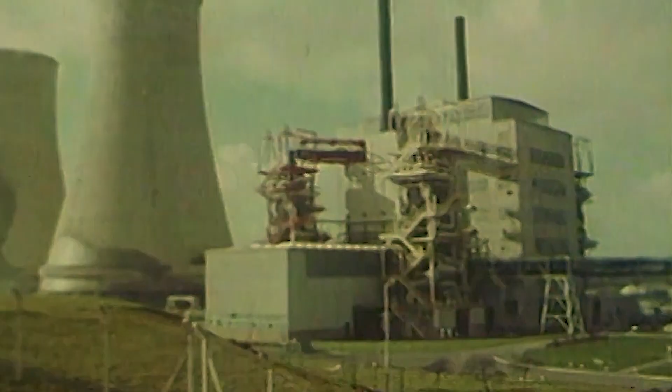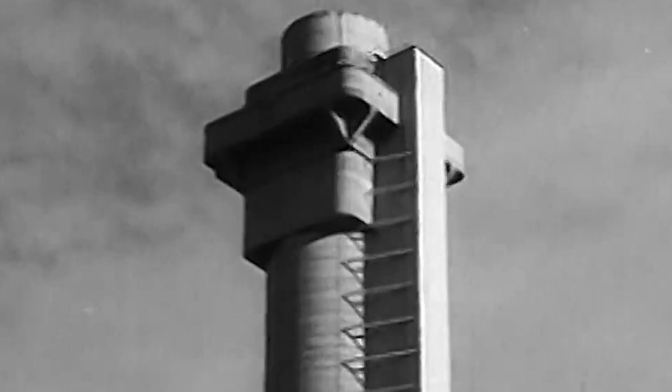Shortly after starting the operation of the piles, and even before the famous accidents, development of a much more economical system was on its way. Magnox was slowly being born with dual purpose in mind. Waste heat the piles produced was now utilized to generate electricity for the national grid. Coolant was far superior in both safety and thermodynamic properties.

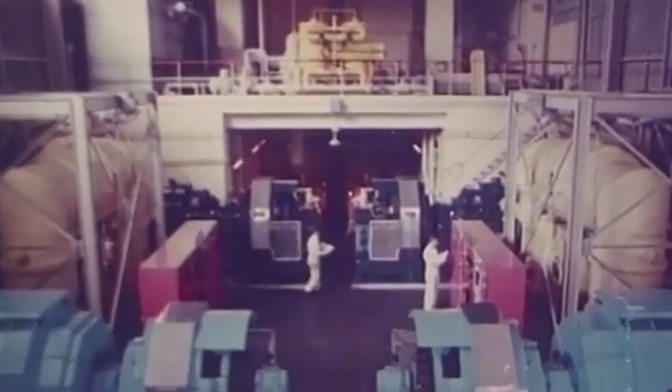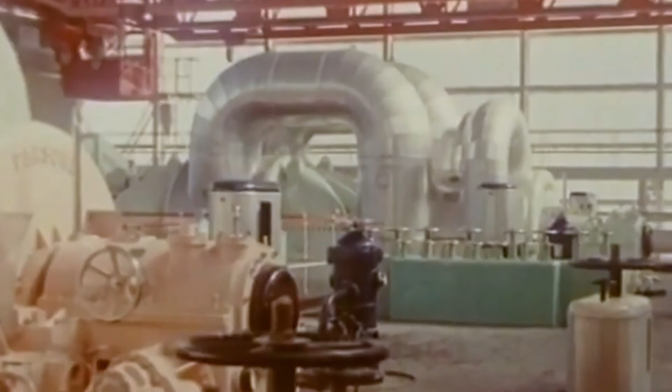Development and evolution of new technologies wasn't stopped there. Parallel with Magnox operation, experiments with an even newer and far superior reactor type began. It was known from the early days of Magnox that it would never be an ideal reactor for pure civilian use of electricity generation. So new, strict and highly ambitious goals were set to make a reactor capable of utilizing state-of-the-art turbines at the time. Turbines whose parameters could be obtained only by fossil fuel plants. In order to obtain those parameters, drastic changes in reactor design were needed.

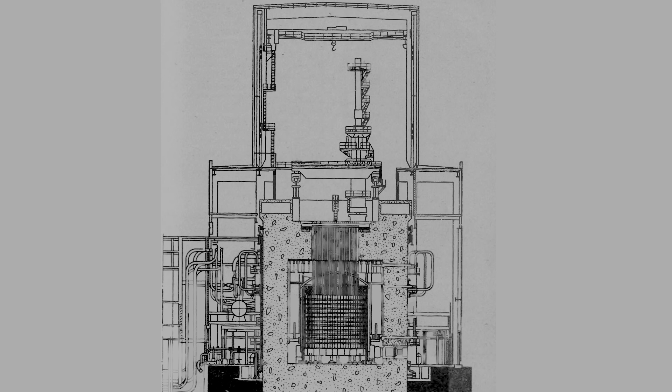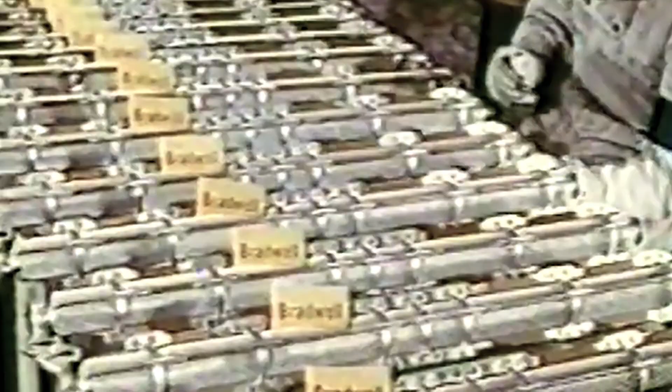High-performance turbines required high-parameter steam. In order to achieve that, the fuel operated at much higher temperatures. Magnesium alloy as cladding and uranium in its metallic form as fuel were no longer suitable. Metallic uranium would alloy with practically any cladding material, so its ceramic form was chosen.

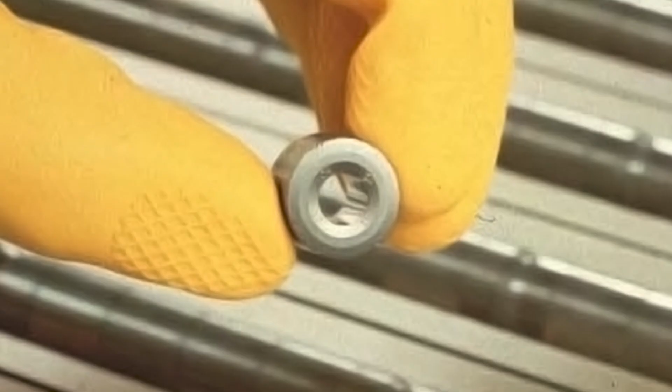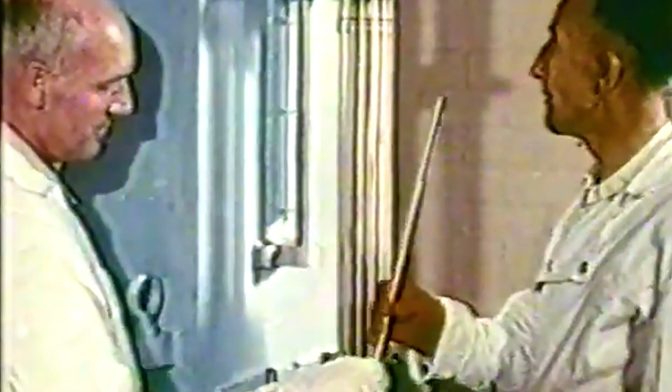Fuel pellets are hollow in the middle. Such design prevents high temperature accumulation and makes room for fission gases. Many of such fuel pellets were stacked inside a fuel pin. Stainless steel was chosen as cladding. Magnesium alloy would simply melt. The new material changed the neutronics of the reactor. Because of the higher capture cross-section area of the stainless steel, enriched uranium was now required.

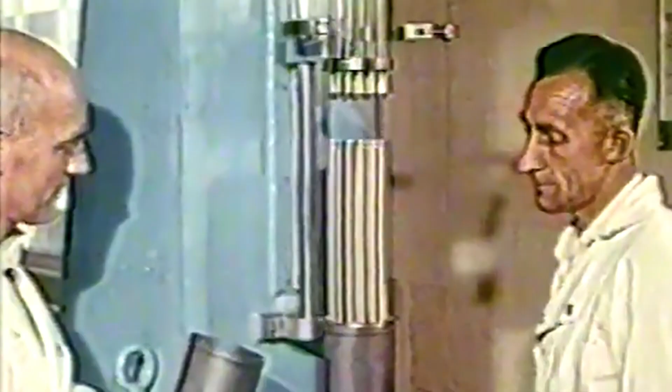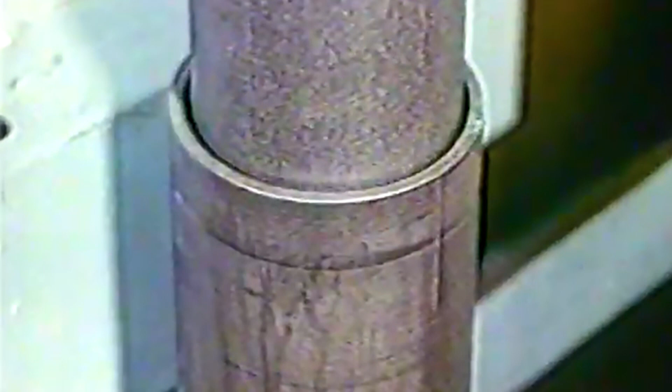Many of such fuel pins in a bundle made one fuel element, and 8 of such elements make the fuel assembly or the stringer. A graphite sleeve is used to divide two gas streams, one of them reentrant.

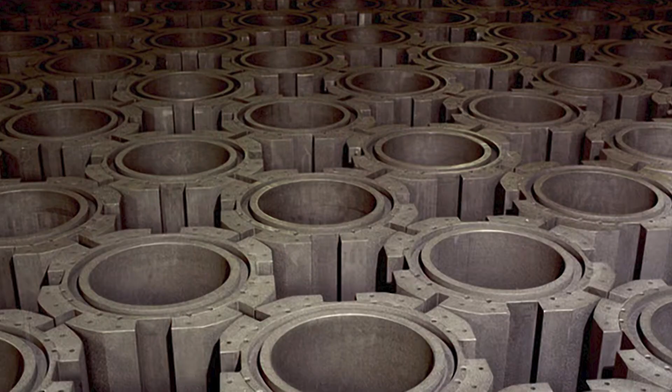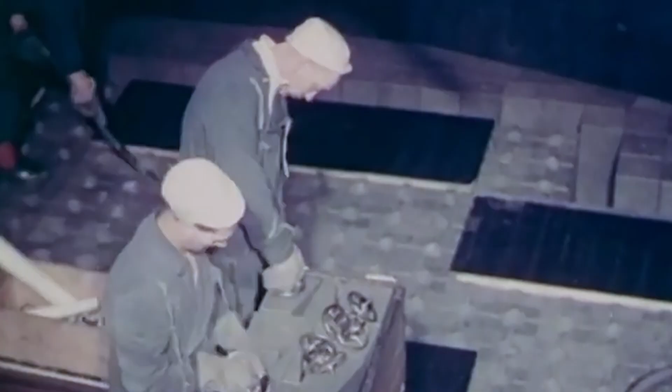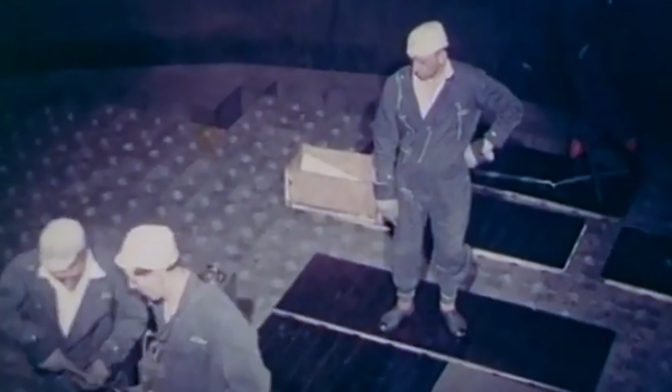Higher fuel temperatures and higher neutron flux degraded the graphite at a much higher rate. Higher temperatures would potentially cause the Boudouard reaction, a reaction between carbon dioxide and graphite, making carbon monoxide. We could simply cool the reactor graphite with the gas stream parallel to the flow around the fuel elements. Unfortunately, such an approach would simply dilute the high temperature gas coming from the fuel channels with the relatively cold gas coming from graphite cooling.

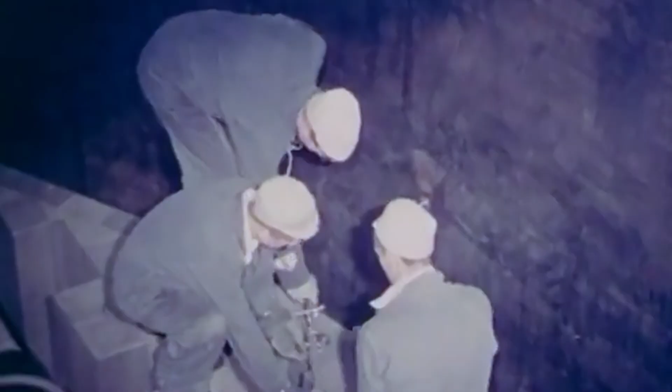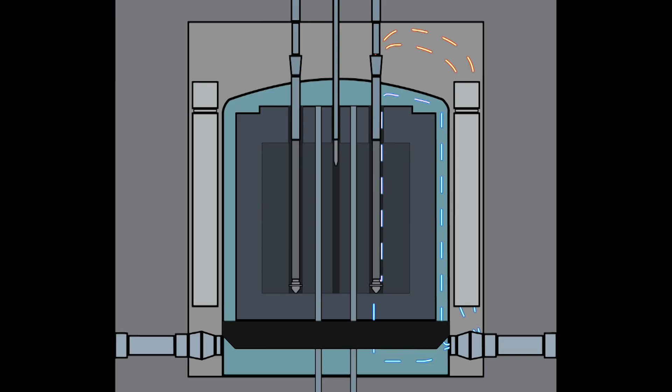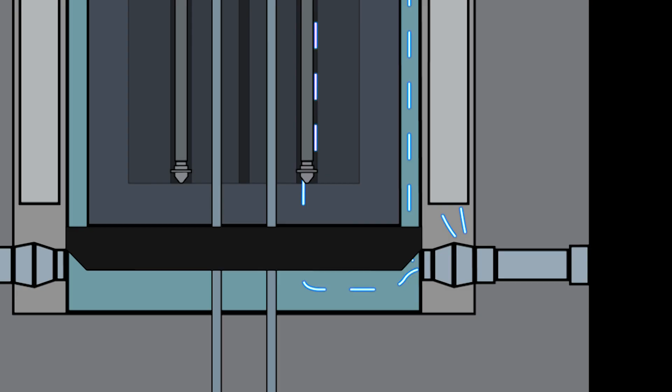Reentrant flow helps us overcome this problem. The animation I made will help us better understand some core principles of this reactor. Most of the gas exiting the circulators goes straight through the fuel assembly. The other portion of the flow goes around the core and through it, cooling the graphite and extending its life. Instead of meeting together, the second flow goes down along the sleeve of the fuel assembly and enters it at the bottom, there meeting with the main flow. All this thanks to a gigantic structure put above the core, the gas baffle.

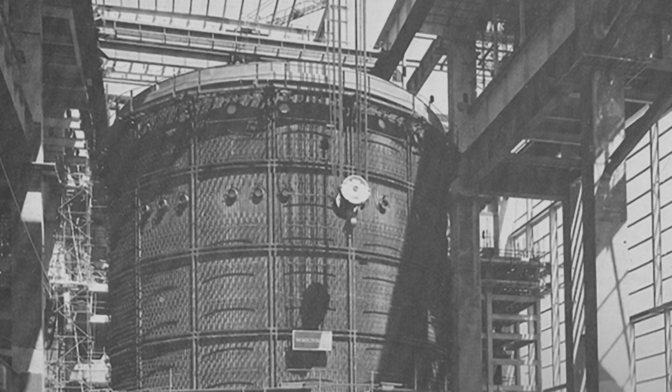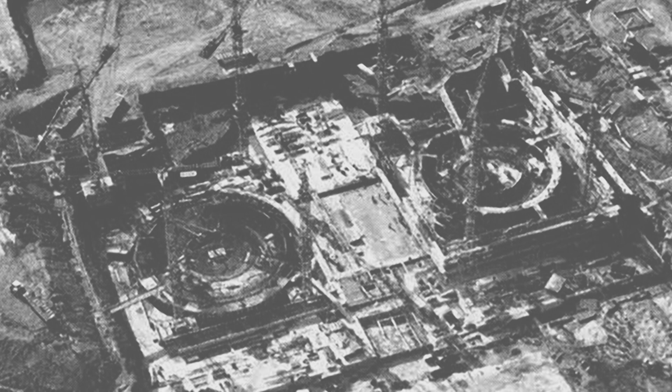It separates two regions, high pressure inside and low pressure outside of it. It makes reentrant flow possible. The core, together with this gigantic baffle, is housed inside an enormous concrete pressure vessel. All that reinforced concrete for only one function, to withstand all the force imposed on the enormous surface, a little over 40 atmospheres of pressure.

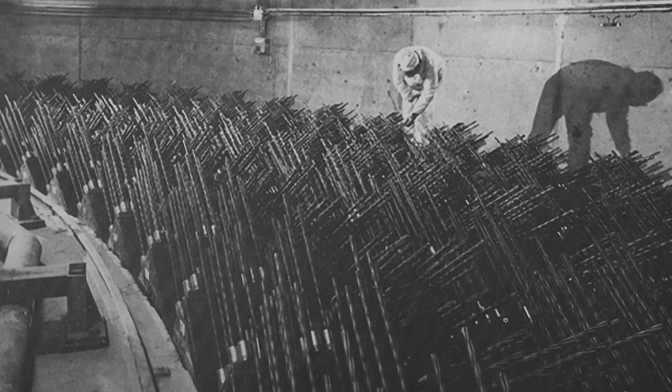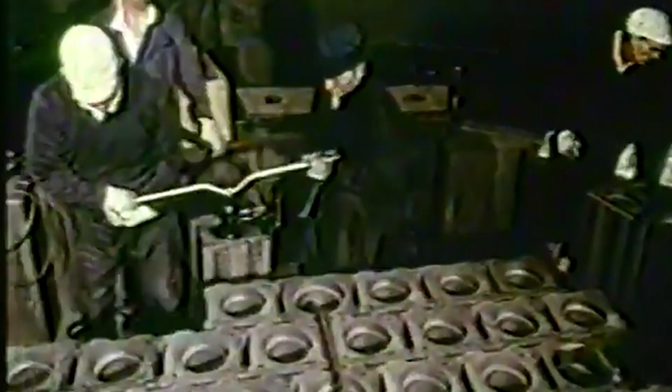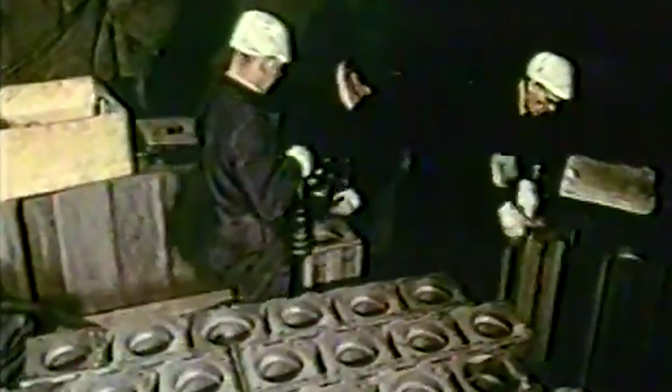Now that we have learned the ultimate design of this reactor and how graphite is protected from high temperatures, let's concentrate on the second enemy, radiolysis. It breaks carbon dioxide into radicals of oxygen and carbon monoxide. The oxygen radical reacts further with the carbon of the graphite, making carbon monoxide. Because of that, graphite bricks were provided with holes, methane channels. Methane was meant to reverse the reaction and deposit back the carbon.

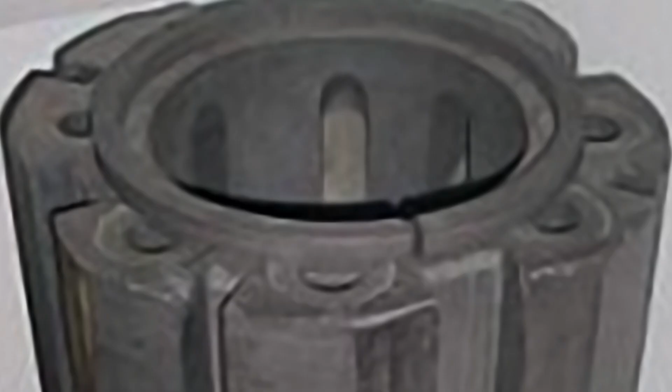The second big advantage of the AGR was its ability for online refueling. Fuel loading and unloading could be performed online thanks to this gigantic machine that definitely deserves its own topic.

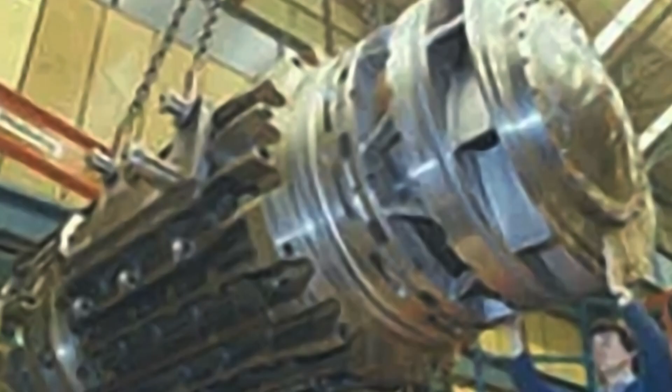Let's now jump to the hidden workhorses of the reactor, gas circulators. After all, safety also depends on them. AGR has 8 of them around the core, 2 per boiler. They are of radial type, electrically driven. Gas flow was regulated thanks to guide vanes. RPM control through frequency was also possible.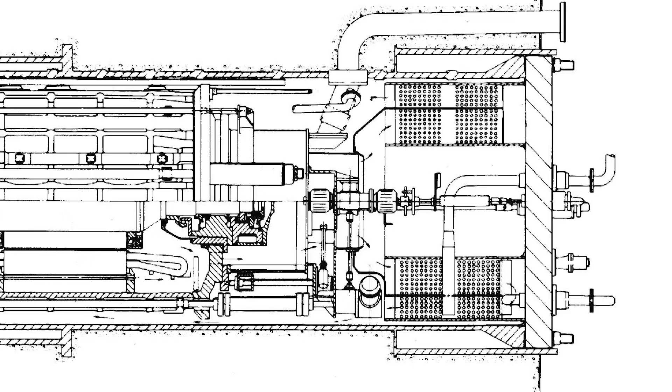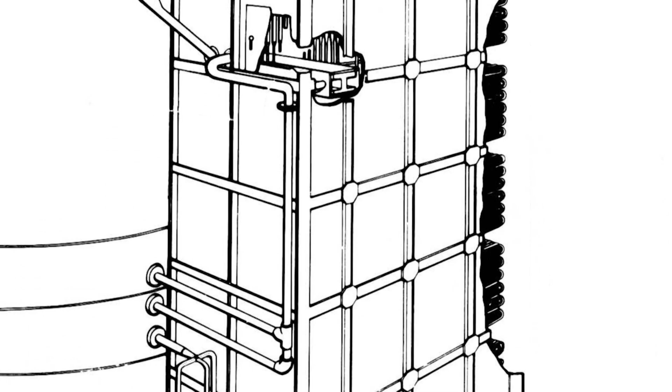There are 4 boilers around the core and inside the pressure vessel. Each one worked independently, had its own feedwater pumps and auxiliaries. Every boiler consisted of 3 units. Boilers were of once-through type. Each unit consisted of economizer, evaporator, superheater, and reheater. Flow of water is countercurrent to the flow of the gas.

Steam from the superheaters is delivered to the high pressure cylinder of the turbine. After doing its work, it is reheated and sent back to the intermediate pressure cylinder. From there, into the low pressure one, and finally to the condenser.

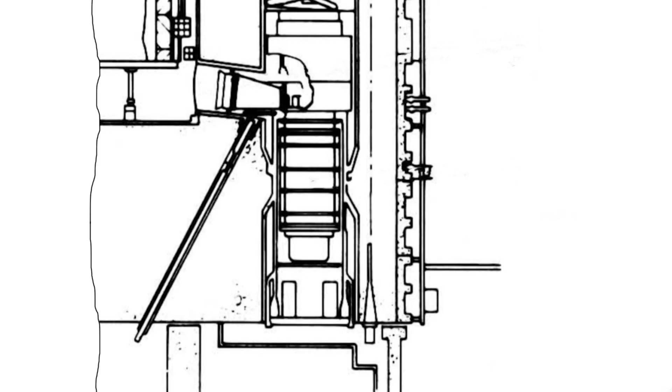We should also mention the other configuration of boilers used at some AGR units. Boilers were outside the vault. This enabled far easier access to the unit. It was historically a newer development, despite the fact that the last reactors used the old serpentine design.

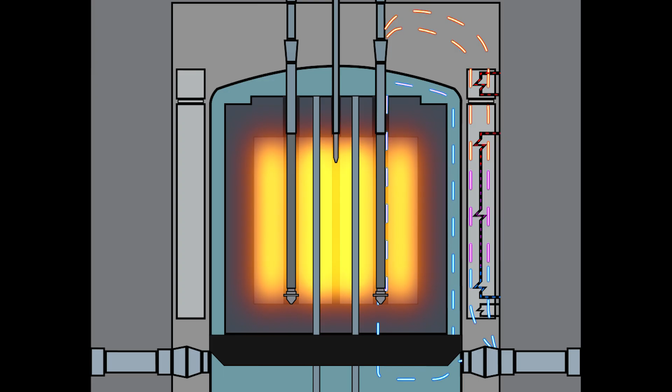Because of the many penetrations control rods need to pass through, there is a possibility of misalignment in case of an earthquake. So in addition to control rods, engineers provided a secondary shutdown system. There are special channels that penetrate the reactor pressure vessel from the bottom, specially made to deliver nitrogen, which has a relatively higher neutron absorption cross-section area.

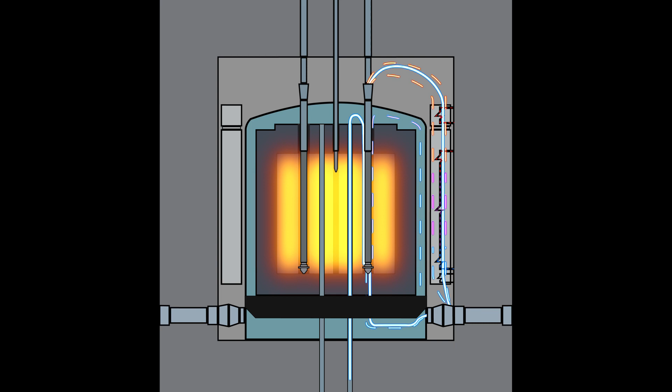Nitrogen is pumped from facilities underneath the reactor, goes through special channels of the core and enters the area just under the dome of the baffle. Then, it also enters the reentry paths and efficiently fills the whole reactor. In case that is not enough, some number of those nitrogen channels are provided for boron bead injection.

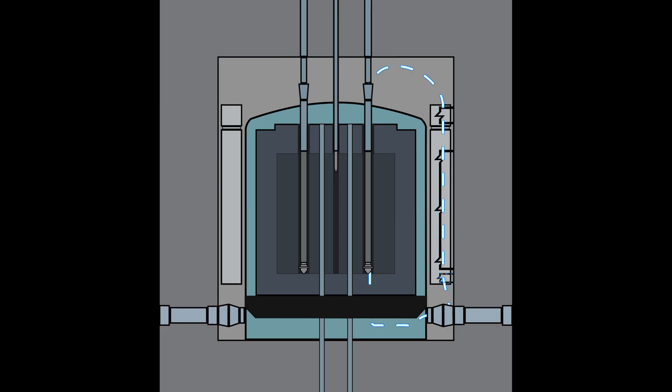During the time of any emergency or abrupt shutdown, the decay heat boiler is used for some time.

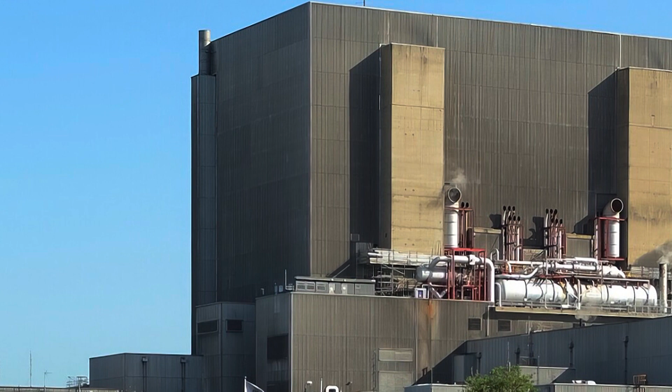The AGR fleet was the most thermally efficient fleet of nuclear reactors ever created, with thermal efficiencies a little over 40%. The AGR helped design other reactors and still provides fascination for many. Over its multiple-decade career, no major incidents happened. Even at the time of making this video, some AGRs are still delivering cheap and clean electricity.